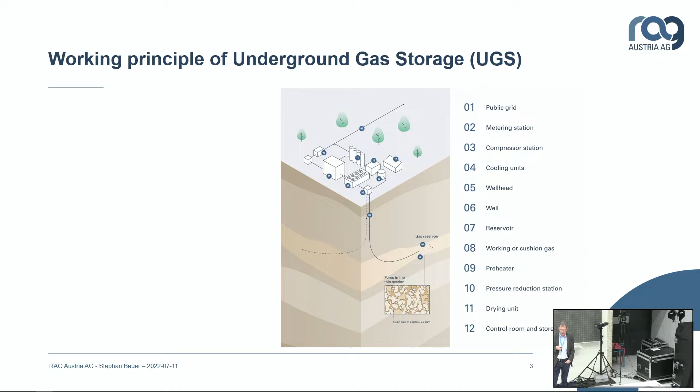Our storage facilities are of the kind of depleted natural gas reservoirs. So we have no salt caverns in operation, just depleted natural gas reservoirs. And after producing those reservoirs, we redevelop them with horizontal drillings to really have high unload and upload capacities. I'm sure most of you are familiar with the working principles of underground gas storage, so I will not go into further detail. You have the main components of a gas storage facility listed here. Now the question is, how do we get renewable energy in those facilities? And why should we do so? Sorry, that was too fast.

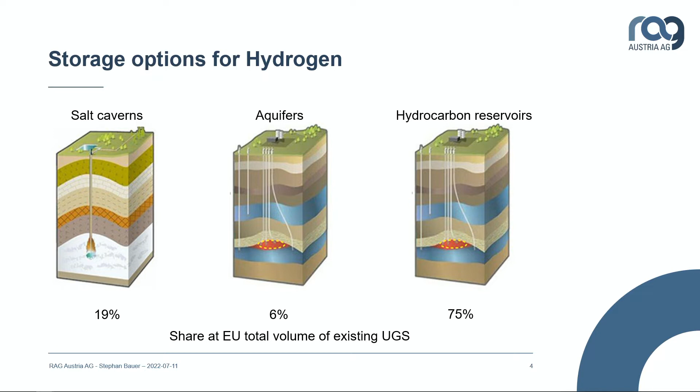One sidestep, we heard already about the different options of hydrogen storage: salt caverns, aquifers, hydrocarbon reservoirs. We often hear the saying, well, forget about hydrogen storage in depleted reservoirs, it's just feasible in salt caverns. Well, I think that is not a good choice, because when talking about existing facilities, about 75% of the volume is located in depleted reservoirs. And if we change to hydrogen storage, we need an even larger volume, because the energy density of hydrogen is much lower. So I think it's wise to also have a look at hydrocarbon reservoirs. And that's what we do.

So we end up in a surplus during summer months and a lack of production during winter months. And we need some sort of seasonal balancing. That's what we heard already. And this problem even increases if we turn the space heat market to electrical heat pumps. Then you increase your electricity consumption at a time when there is no sufficient generation. And the problem of seasonal balancing is even increased. So we need a solution for that.

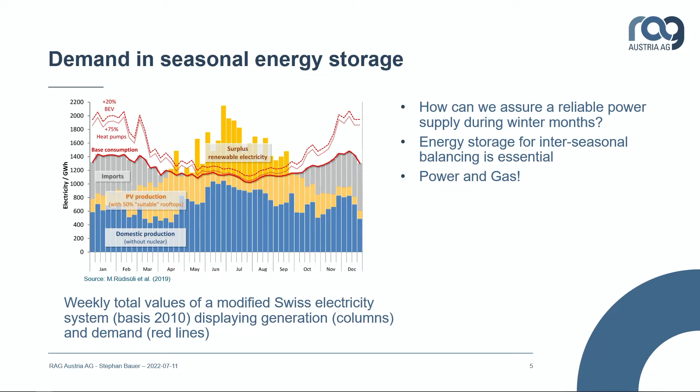The situation here on the North Sea coast might be a little bit different, but as we heard already, even here, the demand of energy during winter months is higher than the rest of the year. And this is just the situation in the electricity market, so we have to also decarbonize industry and so on. So we're talking about a real challenge for the future.

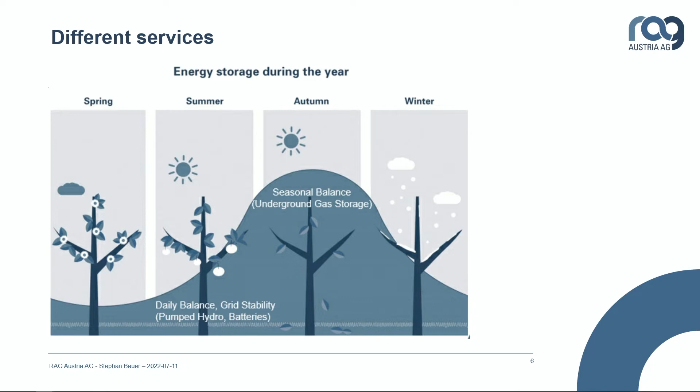Okay, during the past years, we have developed more or less two concepts of renewable energy storage. One is the underground sun storage concept, and the other one the underground sun conversion concept. Both are based on a power-to-gas approach, converting electricity to hydrogen. In the sun storage approach, we directly store the hydrogen. In the underground sun conversion approach, we store hydrogen together with CO2, and we want to start a geomethanation process, so microbial conversion of hydrogen and CO2 in a depleted reservoir.

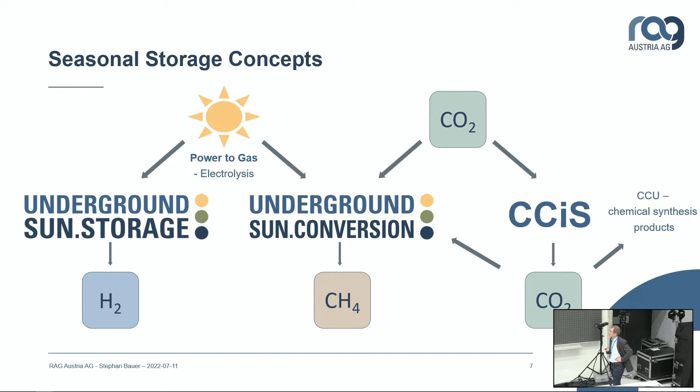Another thing we are thinking about is carbon capture and intermediate storage, so not CCS, permanent storage of CO2, but intermediate storage to also provide CO2 for any synthesis process. Might be a future business case, we don't know yet. Today I'd like to focus on the underground sun storage approach. Sun conversion would be another lecture.

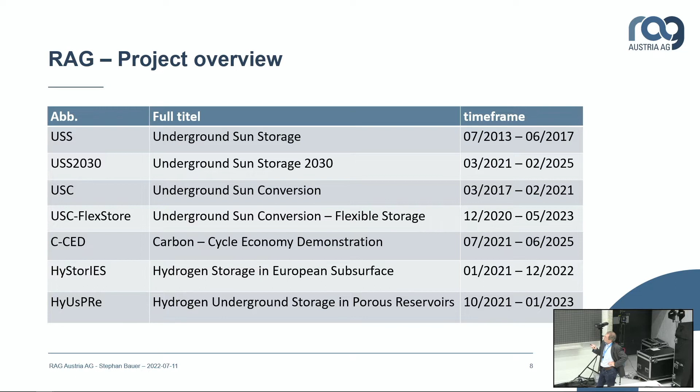Here you can see a project overview listing all the projects we have done in the field. The first two are the underground sun storage projects. Then we have 3 projects dedicated to the sun conversion approach, which I will not talk about today. And then we have listed 2 European projects about underground hydrogen storage in depleted reservoirs. Representatives of those projects are in the auditorium, so we will probably hear about that in the rest of the week. We are happy that we are stakeholders in both projects on European level. But our own projects are listed above. So I will continue to talk about underground sun storage.

The first project we did was from 2013 to 2017. At that time, the discussion was how much hydrogen is feasible in the existing infrastructure. A lot of people investigated pipelines and consumer appliances, but no one did for underground gas storage facilities. So we set up a project investigating about 10% hydrogen admixture to natural gas. It was a first of its kind attempt globally. Maybe there was a second one; Ariel is talking after me. My friend Ariel and I had more or less parallel projects and interactions with each other.

We had a look at the geological reservoir, at materials, we had laboratory experiments, but we also had field experiments, because we didn't want to stick too much to laboratory experiments. We wanted to really showcase field experiments and get real data from one of our fields. There's a final report available under that link. But what were the main results relevant for our follow-up activities?

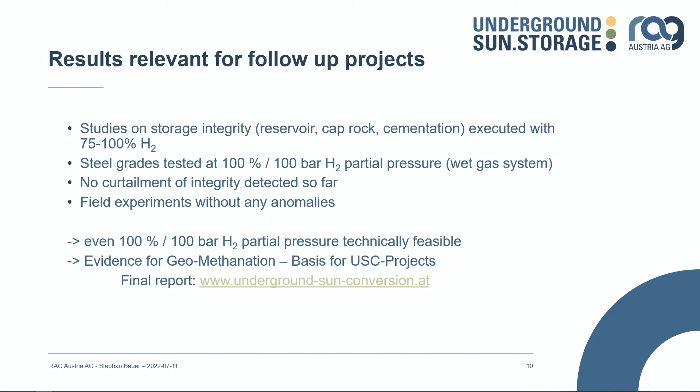So we are quite confident that we can also operate a field experiment at 100% hydrogen or 100 bar partial pressure of hydrogen. And what we also discovered in that setup is evidence for the geomethanation, and that was, of course, the basis for our sun conversion projects. And the first sun conversion project has finished last year, and you can find a final report under the link stated on the slide.

Now, the ongoing project is Underground Sun Storage 2030. It's our project with 100% hydrogen. The project title, Underground Sun Storage 2030, is somehow an answer or a remark to our government. They stated in 2030, Austria has 100% renewable electricity if you balance over the year. And then we said, okay, that might be feasible, but don't forget the seasonal balancing. And that's more or less our answer to their political announcement.

So the principle is quite easy. Again, a power-to-gas process: taking electricity from the grid, have water electrolysis with 2 megawatt, and compress, running over a compressor into a small, isolated, depleted reservoir. The working gas volume of that reservoir is about 1.5 million cubic meters. We fill or withdraw the gas at rates of 400 to 600 cubic meters, and the operating pressure window is in that range. When you withdraw the gas, you have the typical gas conditioning, like you also have in natural gas operation. It's a free water knockout, it's a drying unit.

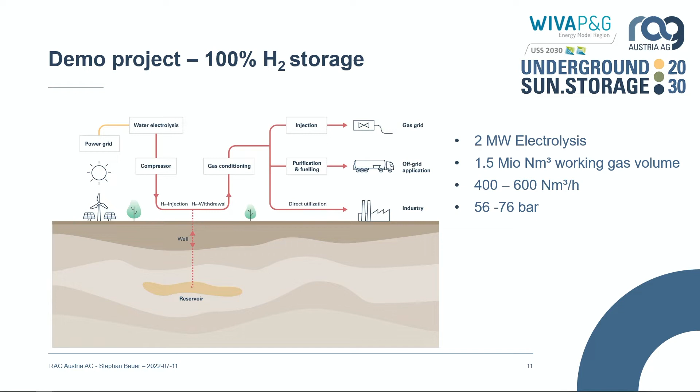Okay, so what are the general objectives? Of course, interseasonal energy storage solution. We want to develop such a solution. We want to prove the technical feasibility in a field test. And we want to compare our results from the field with results from the labs. And we also have included, I will show you the work packages later on, so I can talk about it at that time. And also we want to find use cases for such a storage facility that might be a little bit different than the use cases for underground gas storage now.

Here are listed all the partners in the project. It's a quite large project in Austria, funded by the Austrian Climate and Energy Fund. And also this project is a part of the hydrogen energy model region we have established in Austria, where all the hydrogen projects are summarized or integrated.

Here is a list of all the work packages we have established. I don't want to read them to you, but just the general structure. We have fundamental research, so still some lab experiments and studies, scientific work, and then we have the engineering, construction, and commissioning work for the field test, and then the operation of the field test itself. What we want to do in that project is to really run 2 full seasonal cycles of hydrogen operation.

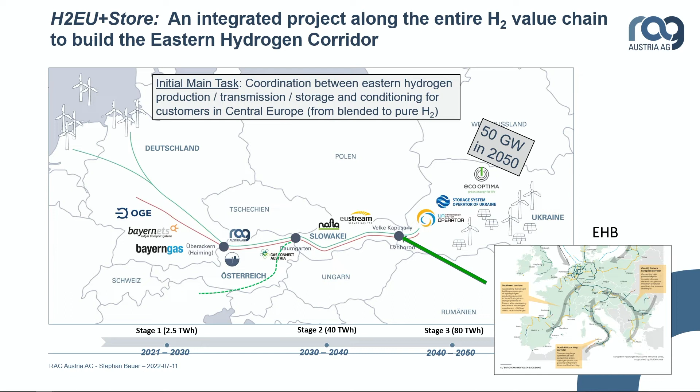And as was said before, no matter if you produce hydrogen here in Europe or if you import it from other countries, you always need storage facilities, either for balancing or to operate your transport routes. So we think about storage facilities at the producing side of the pipelines, and again to structure the commodity at the consumer side. Now

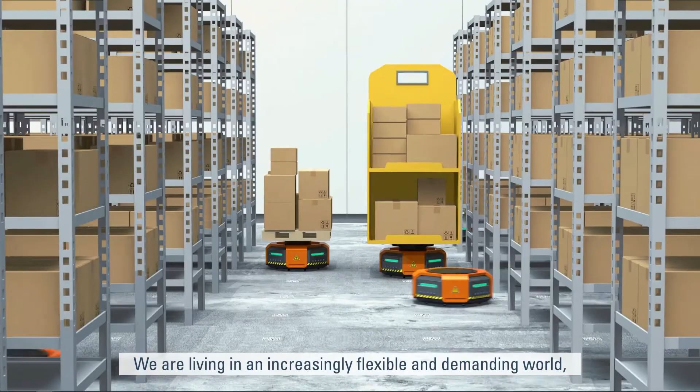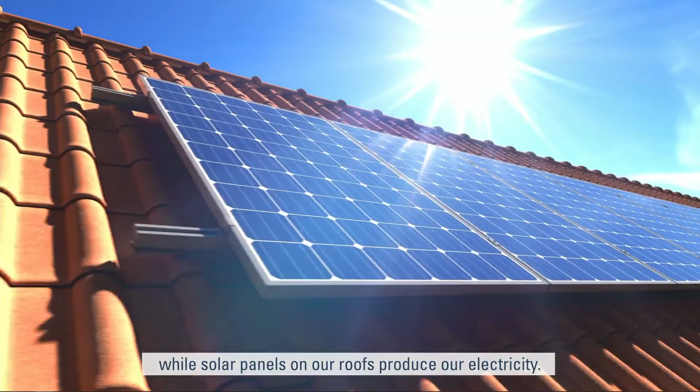We are living in an increasingly flexible and demanding world, and we are plotting a course for the future today. While we accelerate from 0 to 100 kilometers per hour in under 2.7 seconds, a robot vacuum cleaner tidies up our apartment. We are online, always and everywhere, and we can control the heating in our home while solar panels on our roofs produce our electricity. In a world that is built on energy, it needs to be available all the time. And here's the good news: it is.

Our way of life is unthinkable without energy. Particularly in our modern digitalized world, energy consumption will continue to rise sharply over the coming decades. Energy is one of the key issues of our time. Although we are all aware of the importance of energy production, many of us are only now realizing how vital energy storage has become. Without large-scale energy storage solutions, daily electrical supply would constantly collapse, especially during winter, and the transition towards sustainable and CO2-neutral energy sources would be impossible.

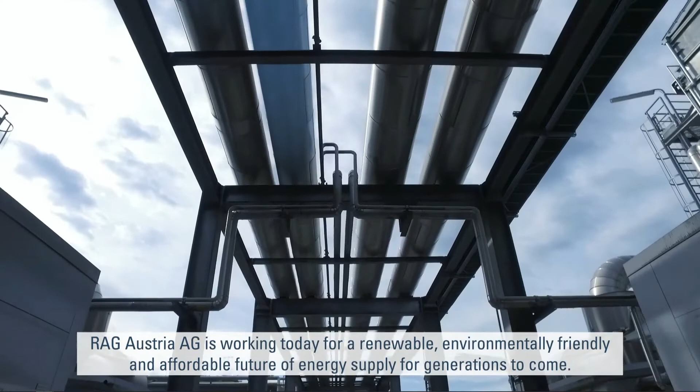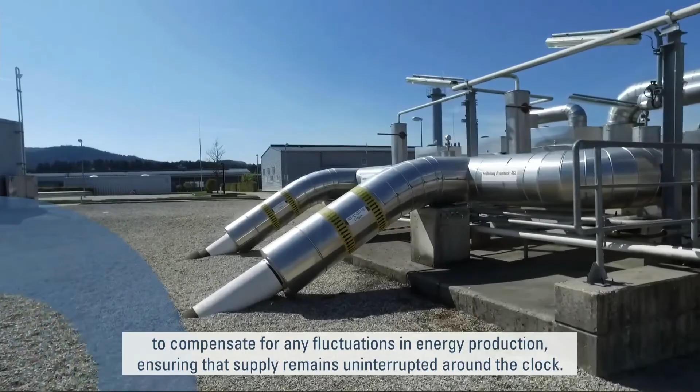RAG Austria AG is working today for a renewable, environmentally friendly and affordable future of energy supply for generations to come. Gaseous energy sources are the only way to meet the energy challenges of the future. Natural gas is the only resource capable of being stored in amounts sufficient to compensate for any fluctuations in energy production, ensuring that supply remains uninterrupted around the clock. The transition to sustainability will only be possible with natural gas.

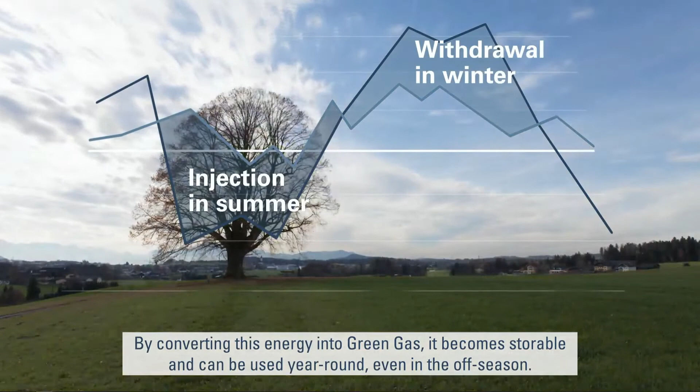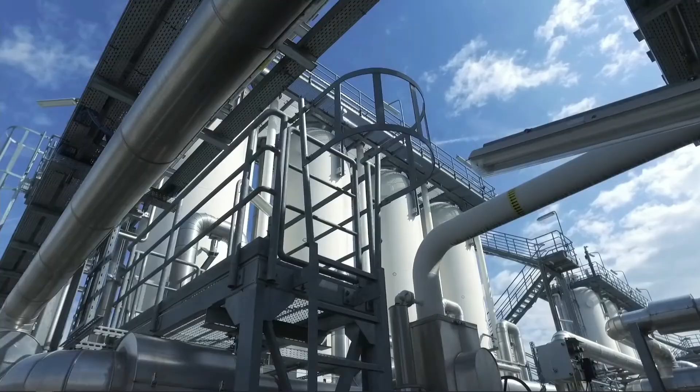Renewable energy sources are dependent on sun, wind, and water levels. As a result, most of our renewable energy is produced during spring and summer. By converting this energy into green gas, it becomes storable and can be used year-round, even in the off-season. RAG uses several green gas technologies to provide clean and reliable energy supplies. Above all, RAG's existing natural gas reservoirs already guarantee continuous supply, both for industrial purposes and the public.

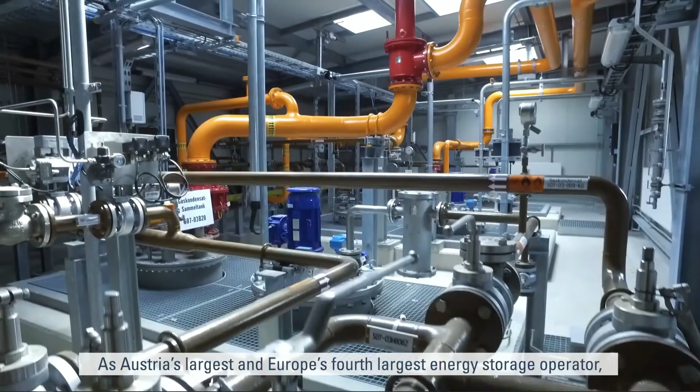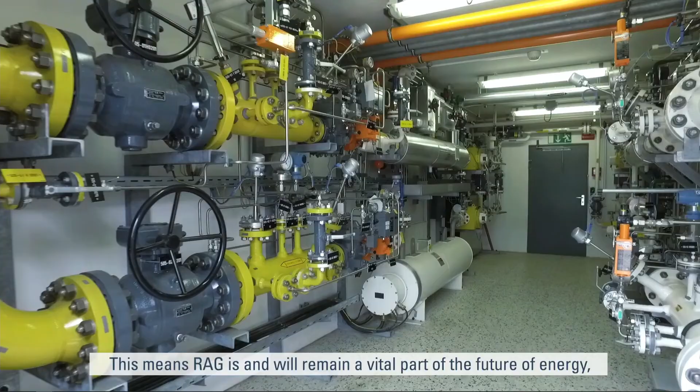As Austria's largest and Europe's fourth largest energy storage operator, RAG is capable of stockpiling enough gas to supply almost all of Austria for an entire year and provides its customers and partners in Austria and Central Europe with gas at high capacity. This means RAG is and will remain a vital part of the future of energy, enabling the transition to sustainability to be completed realistically, sustainably, affordably, and within the foreseeable future.

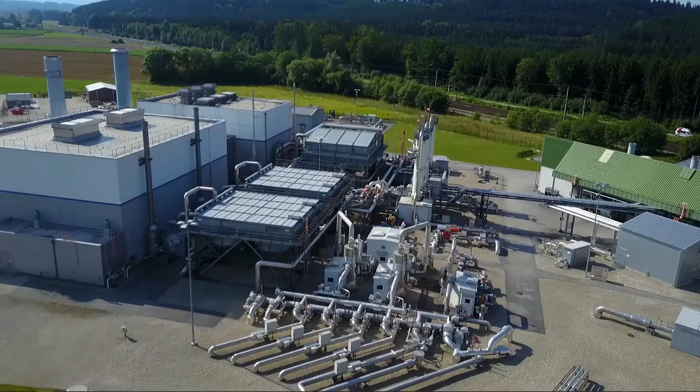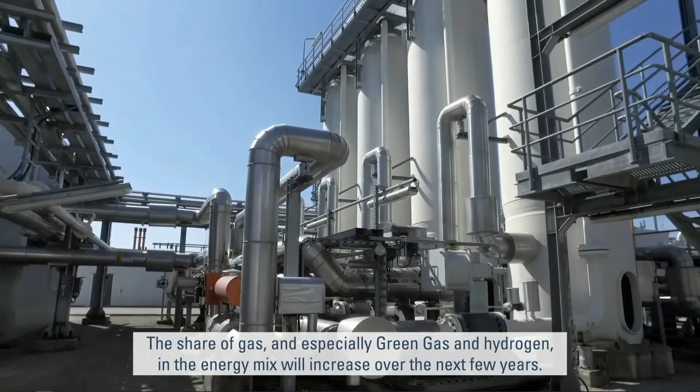RAG uses natural underground reservoirs as modern, sustainable energy centers. The concept of sustainable energy mining enables the production and storage of clean, green gas. The share of gas, and especially green gas and hydrogen, in the energy mix will increase over the next few years. So the future of energy supply will only be 100% green with gas. RAG, renewables and gas.